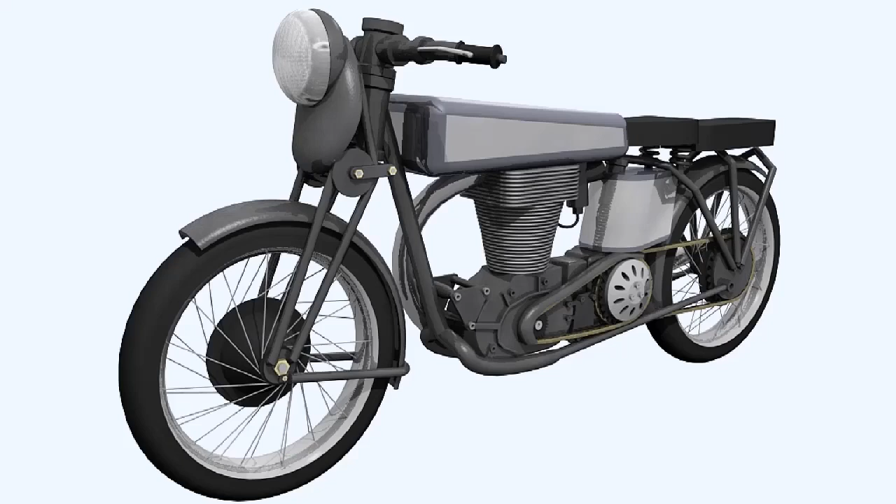In the introductory lesson, we looked briefly at the principle of operation of a four-stroke piston engine, considering one cylinder only. Actual engines, mostly motorcycle engines, have indeed been manufactured using one cylinder only. But by increasing the number of cylinders fitted to an engine, a designer can create more powerful units. Adding more cylinders also has the added advantage of enabling the engine to run more smoothly.

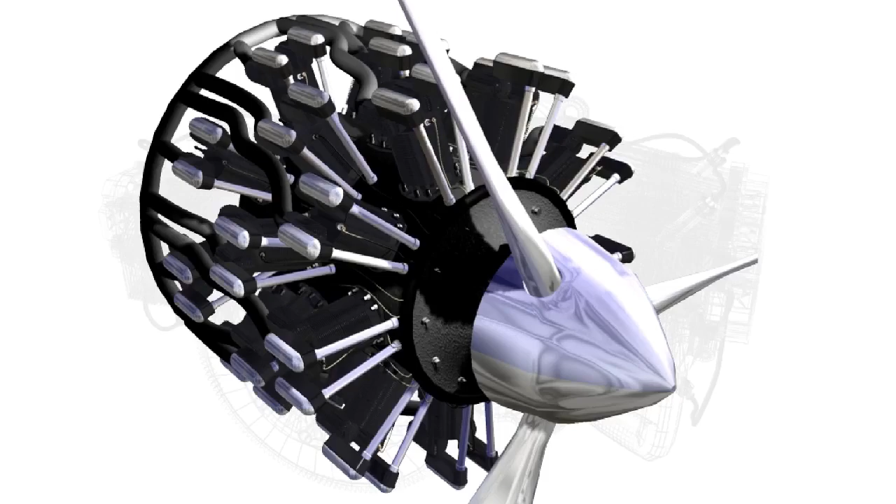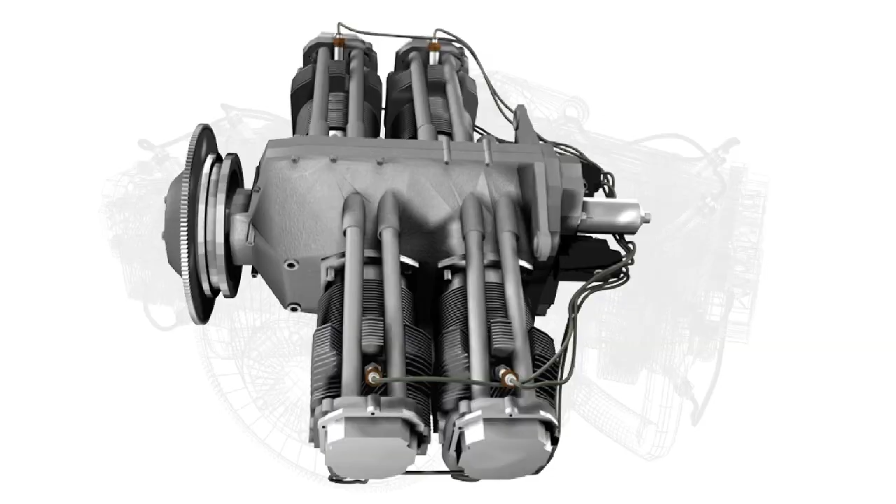A typical design for a light aircraft engine incorporates just 4 cylinders. The cylinders can be configured as either inline or horizontally opposed, the latter being the type of engine most favoured in most modern light piston-engined aircraft.

The inline engine can sometimes be fitted to run inverted.

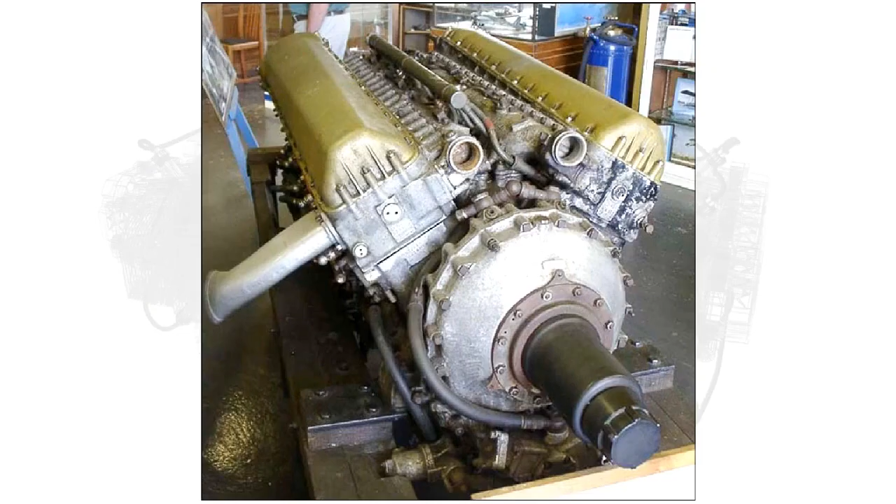The V-cylinder arrangement was used for larger, more powerful engines of between 8 to 12 cylinders. These engines, of which the Rolls-Royce Merlin and Griffon were 2 examples, were used in the fighter and bomber aircraft of World War II.

Engines of this type were liquid-cooled, and consequently much bulkier than their air-cooled predecessors, but the V-cylinder arrangement allowed them to be contained in a slimmer package, making it easier to streamline them into either the fuselage or engine nacelles in the wings, thus reducing drag.

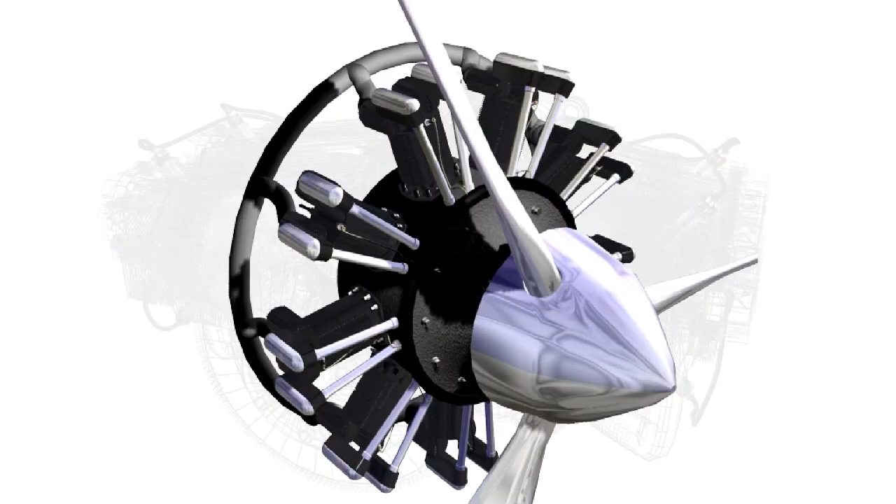If, on the other hand, cylinders are arranged radially around the crankshaft in banks, then, although this makes for a larger frontal area, and as a consequence more drag, the engines thus produced are much shorter and lighter than inline engines for comparable power output.

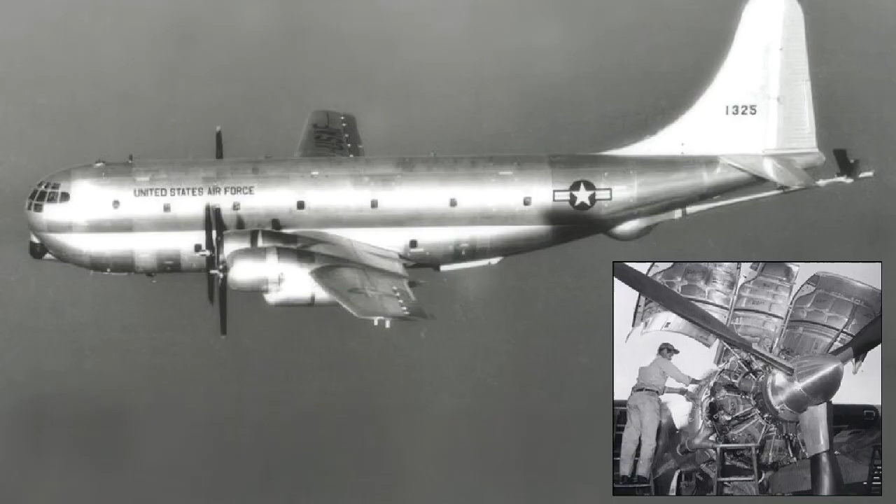Engines which comprised 2 or 3 banks of 9 cylinders were used to power the large airliners of the 1950s and 1960s.

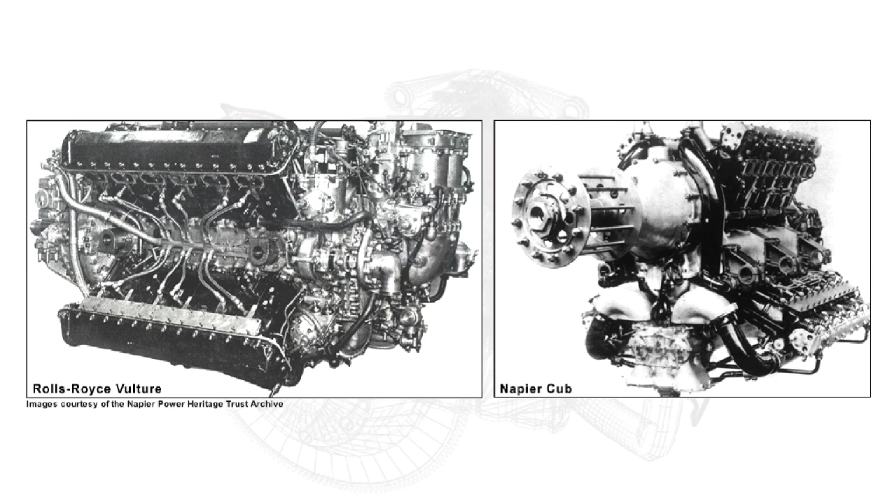Subsequently, Napiers designed the 24-cylinder Sabre engine, which was used to power the Typhoon and Tempest aircraft during the Second World War. This engine had the cylinders arranged in an H configuration.

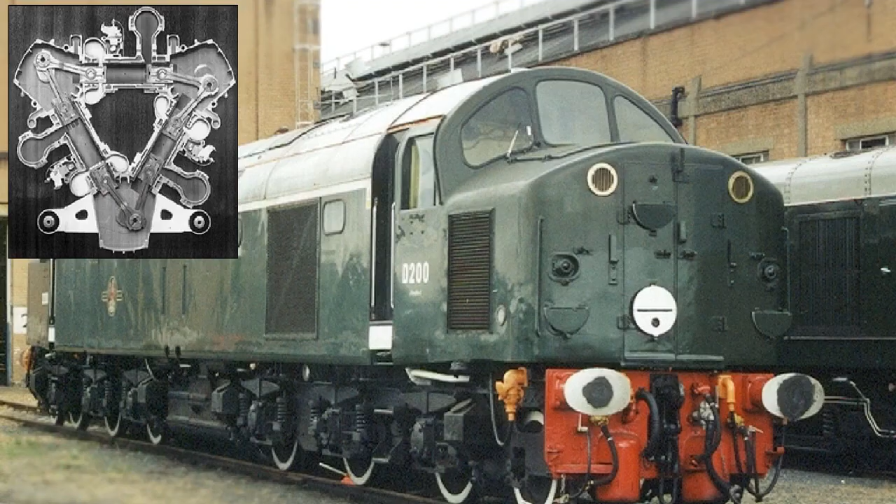After World War II, Napiers designed and developed the Deltic diesel engine, which is still used in railway locomotives, being capable of in excess of 1,750 brake horsepower. These engines had a triangular cylinder arrangement, as is shown in this picture.

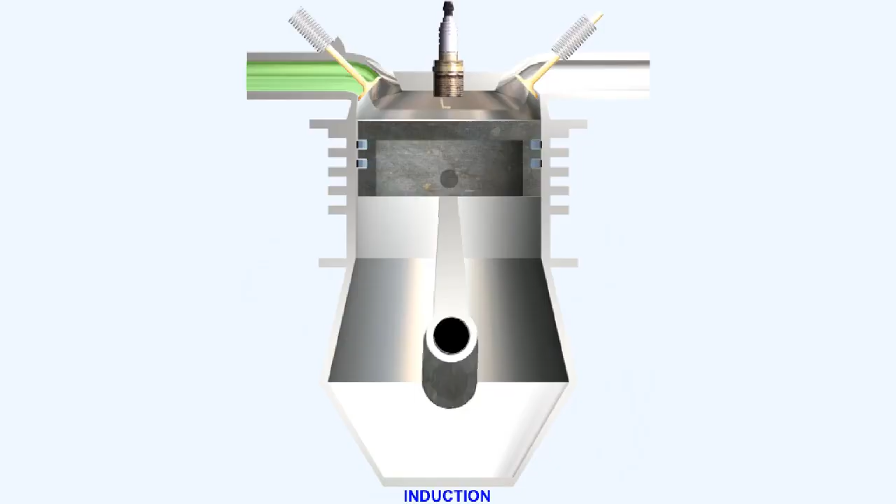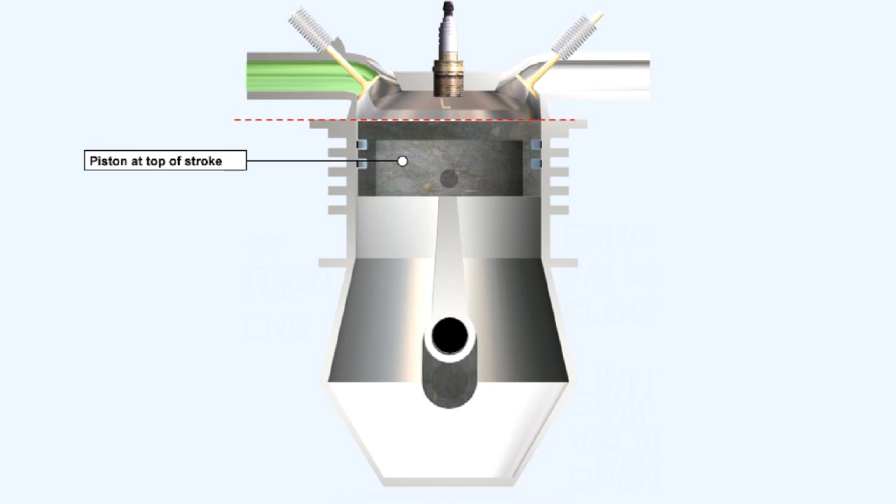In the introductory lesson, we explained the basic principle of the four-stroke engine using the theoretical Otto cycle. When the piston is at the top of its stroke, the crankshaft is said to be at top dead center, or TDC. And when the piston is at the bottom of its stroke, the crankshaft is said to be at bottom dead center, or BDC.

The stroke is defined as the distance that the piston moves in the cylinder when the crankshaft rotates between top dead center and bottom dead center.

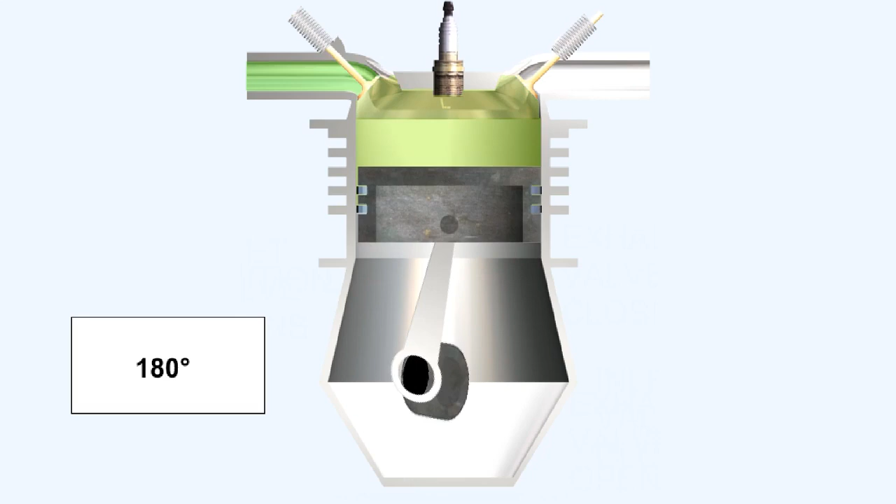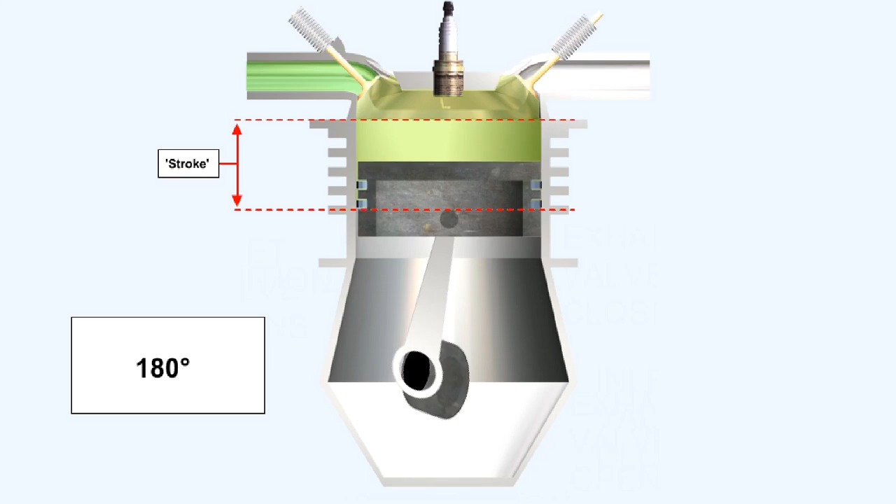The piston is connected by a connecting rod to a crankshaft, and as the piston moves from the top of its stroke to the bottom of its stroke, the crankshaft rotates through 180 degrees. The complete cycle of 4 strokes takes 720 degrees of crankshaft rotation.

The distance between the center line of the crankshaft journal and the center line of the crank pin is the crank throw. The stroke is equal to twice the crank throw. The internal diameter of the cylinder is called the bore.

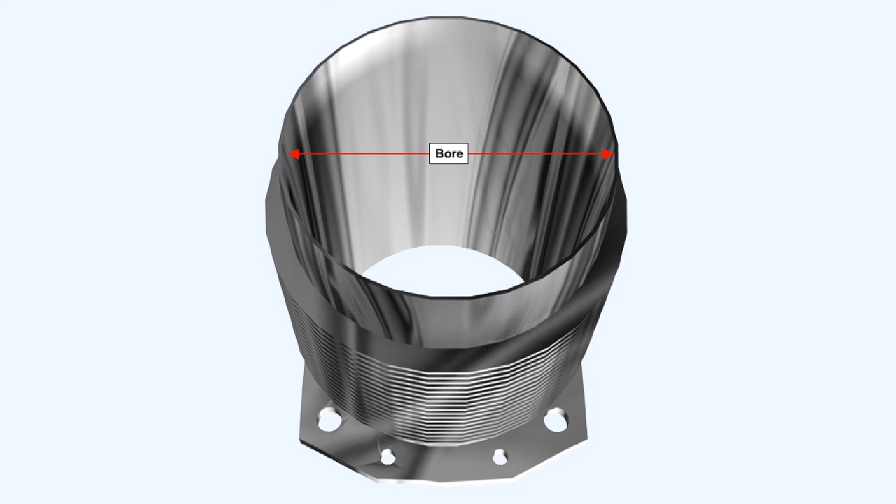We'll use these terms, and others which we'll introduce later, to explain the Otto cycle.

When discussing valve timing and ignition timing, we refer to their operation as occurring at specific points within the crankshaft's rotation, which are designated by the number of degrees that the crankshaft has rotated from top dead center. 180 degrees of rotation from top dead center will bring the crankshaft to bottom dead center. Another 180 degrees of rotation will bring the crankshaft back to top dead center.

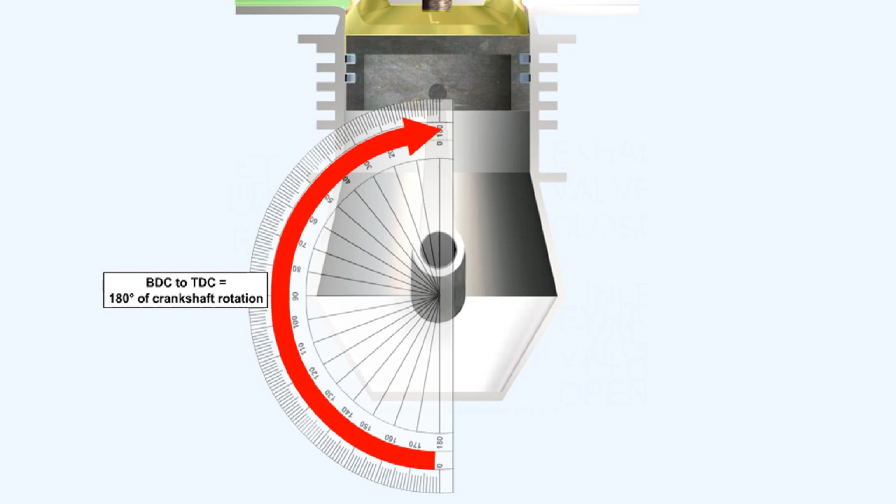This animation illustrates the timing diagram of the theoretical Otto engine. Notice that all of these significant events happen either at crankshaft top dead center or bottom dead center.

Initially, as the crankshaft starts to rotate and the piston moves down on the induction stroke, the inlet valve opens at top dead center and remains open for the whole of this period, closing as the piston reaches the bottom of its travel, crankshaft bottom dead center. The crankshaft has rotated through 180 degrees.

With the inlet valve now closed, the piston moves upwards on the compression stroke, squeezing the mixture into a smaller and smaller volume and thus increasing its pressure. The crankshaft rotates through another 180 degrees during this operation, making one full revolution so far after 2 strokes.

The piston is now stationary at the top of its travel, at crankshaft top dead center, before it starts to travel down on the power stroke. In theory, it's during this period that combustion occurs instantaneously, triggered by the ignition spark, which also occurred at crankshaft top dead center. Because the piston is stopped, the volume of space in which combustion occurs is not changing—it's constant. For this reason, as stated in the previous lesson, the engine is called a constant volume engine.

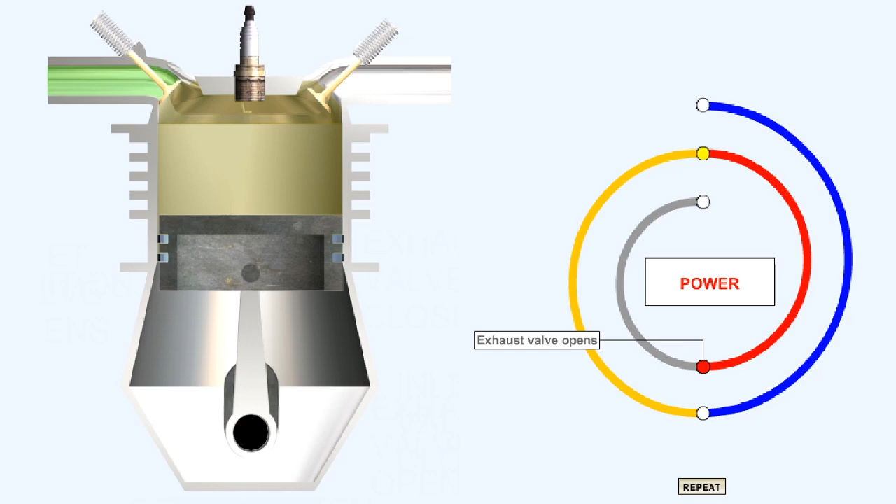When the piston reaches the full extent of its downward travel, with the crankshaft at bottom dead center, the exhaust valve opens. With the exhaust valve now open, the piston is driven upwards by the rotation of the crankshaft from bottom dead center to top dead center. The exhaust gases are driven out of the cylinder through the exhaust port against the pressure of the atmosphere. When the crankshaft reaches top dead center, the exhaust valve closes.

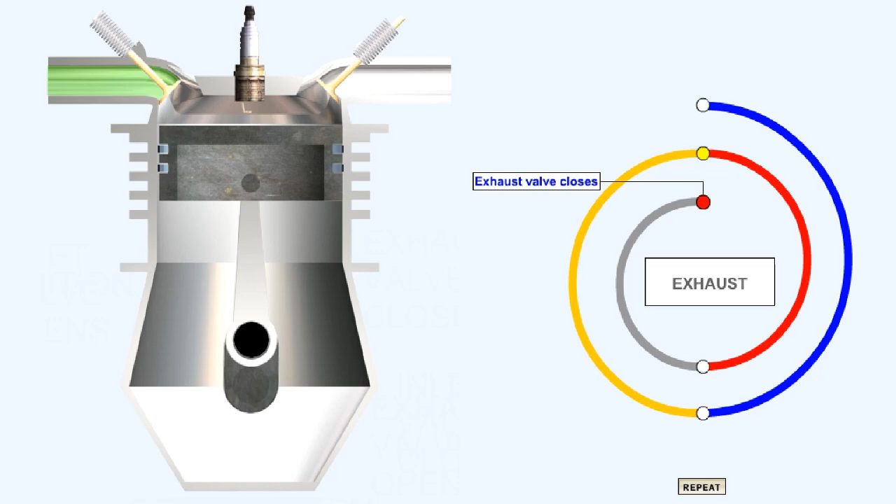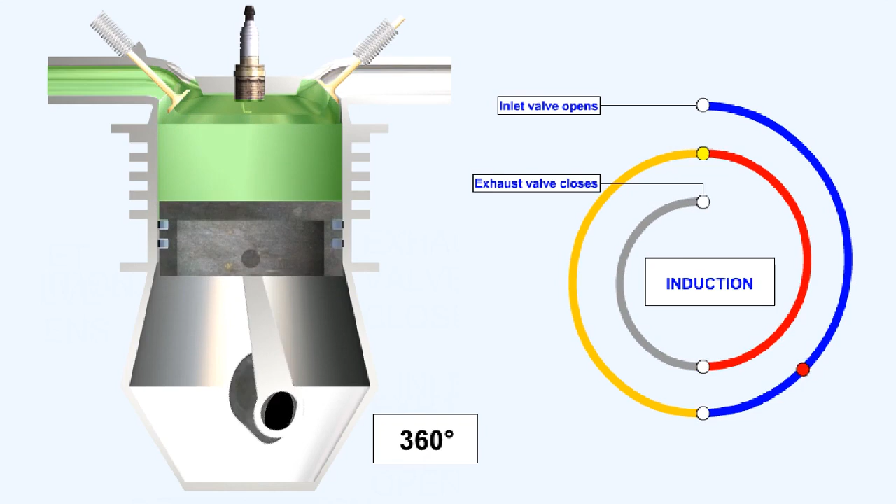This completes the 4-stroke cycle. Remember, the 4 strokes are called induction, compression, power, and exhaust, and they always happen in this order. The crankshaft has completed 2 full revolutions during the period of the 4 strokes. The whole cycle now repeats continuously until it's terminated by switching off the engine.

In practice, the theoretical cycle proved to be unworkable. So, to make it work efficiently, it's necessary to modify the times when the valves open and close, and when ignition occurs—in other words, to change the valve and ignition timing.

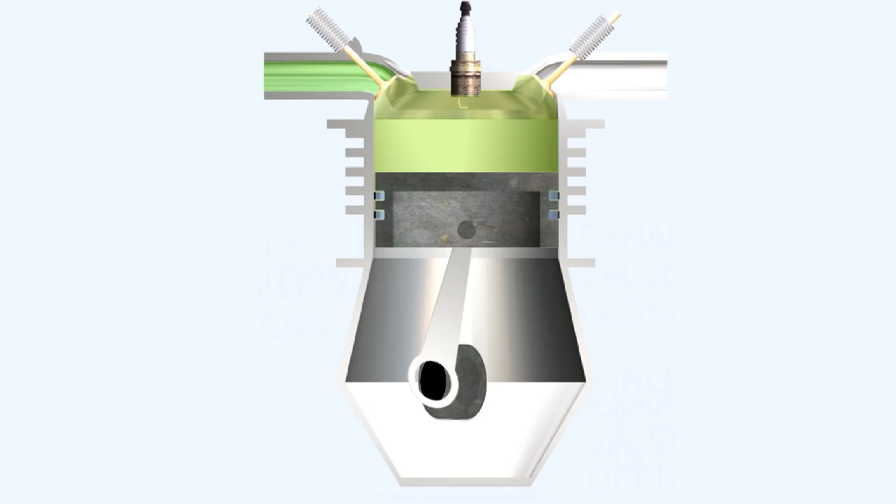The animation which follows uses a practical timing diagram like this to illustrate changes that have had to be incorporated into Otto's theoretical 4-stroke cycle, in order that it could work more efficiently. The timings shown are imaginary and are not to be associated with any particular type of engine.

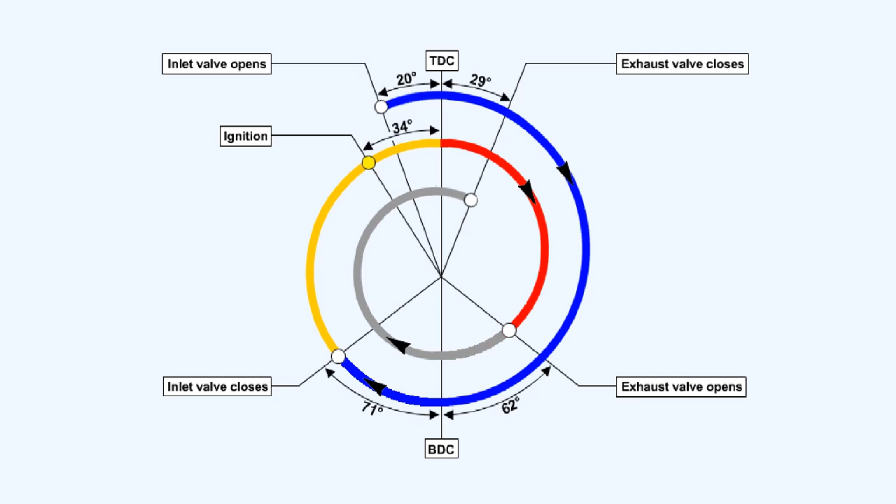The first change to notice is that the inlet valve has been arranged to open 20 degrees before the crankshaft reaches top dead center. This will ensure that the valve is fully open early in the induction stroke.

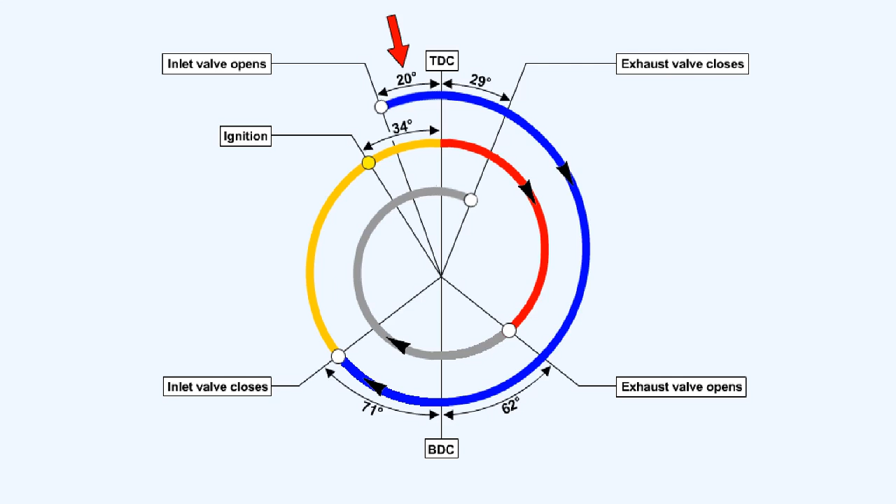This means that there will be no delay between the piston moving down and the mixture flowing into the cylinder, as would normally occur because of the inertia of the mixture. The incoming mixture can therefore keep up with the descending piston more easily.

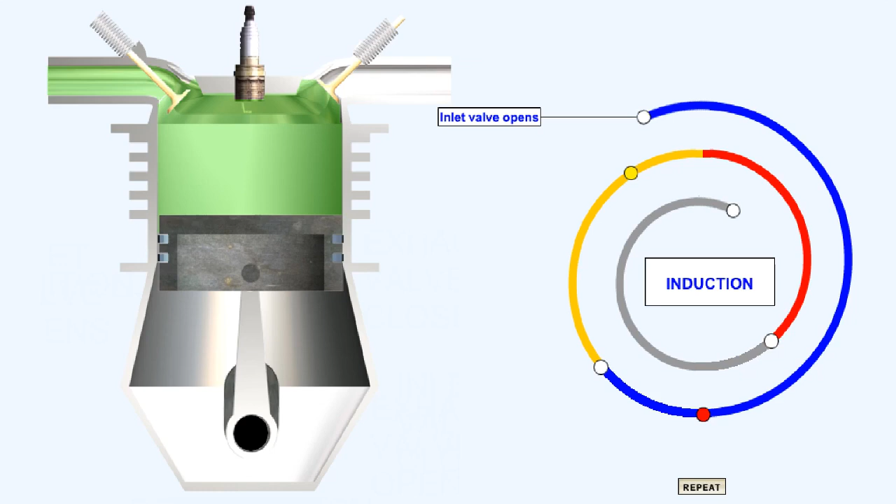The momentum of the mixture increases as the induction stroke proceeds, and towards the end of the stroke it is such that the gases will continue to flow into the cylinder even though the crankshaft has passed bottom dead center and has driven the piston upwards slightly. Closure of the inlet valve is therefore delayed until after bottom dead center, when the gas pressure inside the cylinder approximately equals the gas pressure in the induction manifold.

As the piston continues to move upwards, the inlet valve closes and the gas is compressed. By squeezing the gas into a smaller space, the pressure that it will exert when it's burnt is proportionally increased.

It should be noted that as the gas is compressed, it becomes heated adiabatically, in the same way that a bicycle pump warms up in action, as well as by conduction from its hot surroundings, and the pressure consequently rises to a higher value than that to be expected from the reduction in volume alone.

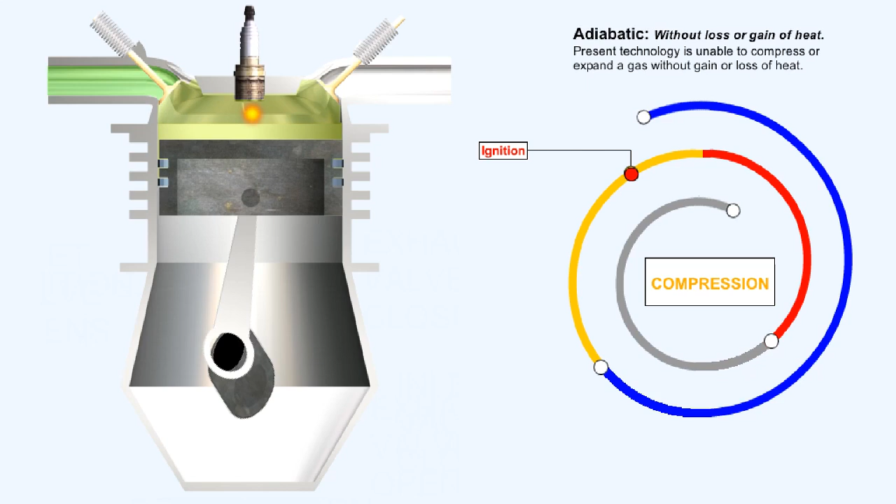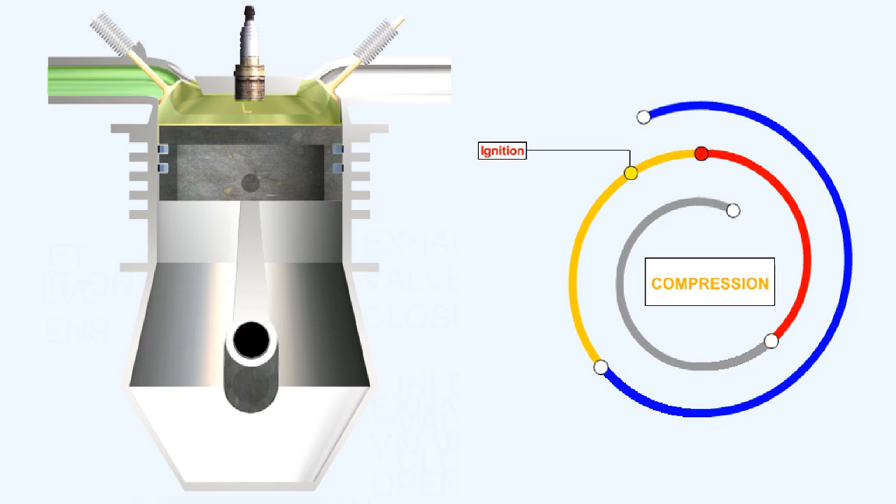Before the piston reaches the end of the compression stroke, in this particular case 34 degrees before the crankshaft reaches top dead center, the gas is ignited by a spark. The momentum of the moving parts carries the crankshaft up to and past top dead center, whilst the flame is spreading through the combustion chamber.